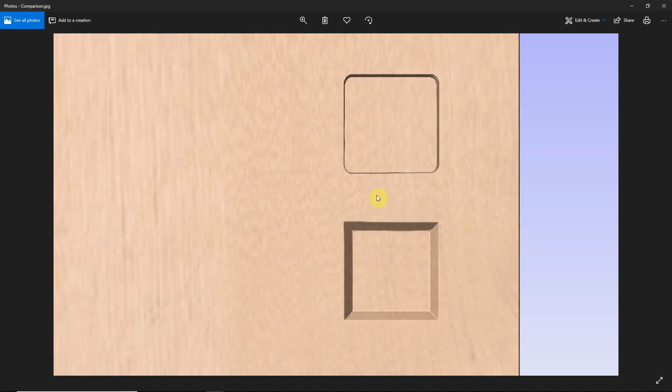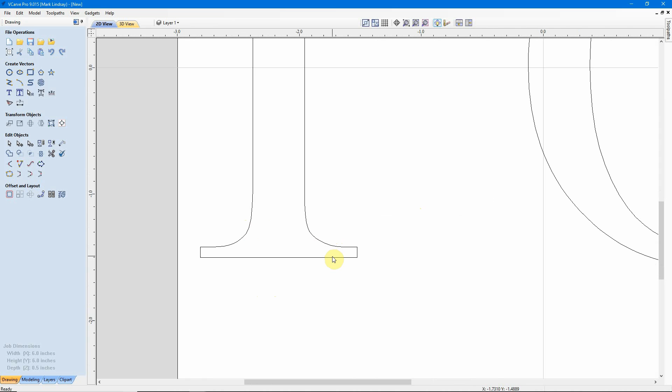Now, another thing to pay attention to: I said the distance between this vector here and this vector here, that also means the distance between them over here, and the distance between this vector here and this vector here. V-carving is considered by some to be 2.5 dimensional carving, and by others to be 3-dimensional carving, meaning that all 3 axes work at the same time to carve out this area here. Let me go ahead and calculate the toolpath and I'll show you exactly what I mean.

So I'll select the text here. We'll go over to the toolpath tab, and I'm going to go down here to the VCarve/engraving toolpath. Select that, and our start depth will be 0. We are going to start at the top surface of the material. When V-carving, always set your Z0 to the top of the material. So I'm going to use a start depth of 0. I'm not going to use a flat depth. We'll get into that in another video.

The V-bit I'm going to use for this demonstration is a 90-degree V-bit with a 1/2 inch cutting diameter. I'm not going to make any changes here at all. I'm simply going to call this V-carve 90 degree, and we'll calculate. Now we have our toolpaths created, and if you notice, it looks a little bit different than what we would imagine. If we get over here into the O, we see it's going to have to make a couple of passes at different depths.

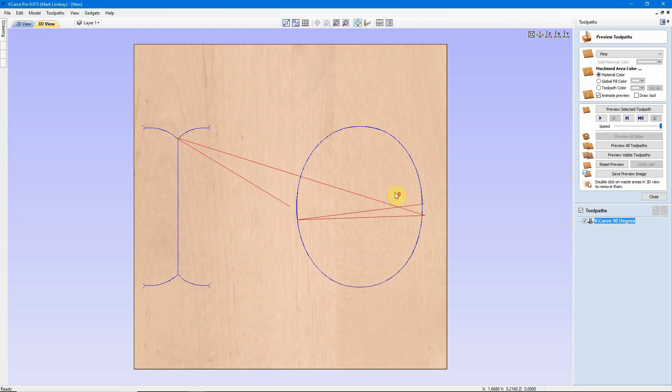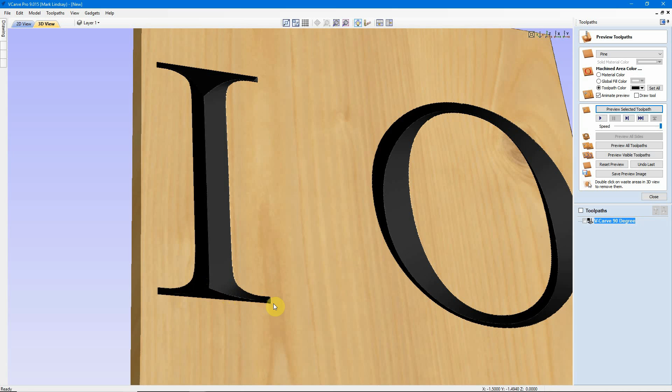I'm going to leave the material alone. I will select the toolpath color, black. Well, that jumped to pine. Okay, fine. And we'll preview this toolpath. And as you can see, when we zoom in a little bit, our tool carved a straight line down here at a depth. Then when it got to this corner, it made a curved pass, and the Z kicked in and retracted that bit to make this nice narrow portion in here. Then it came back, lifted up here to make that square corner, lifted up here to make that square corner.

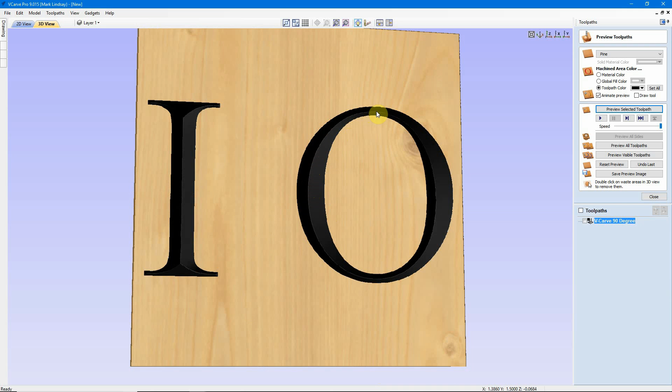By the same token, look at this O, because we have a wider area here between the outside and the inside of that O. We cut pretty deep here. Then as this vector narrowed down, the Z kicked in and lifted that bit up, and we cut much shallower here. Now if you recall from the other tutorials, if we look down here at my X, Y, and Z display, you can see my Z is at 0 because it's on the material surface.

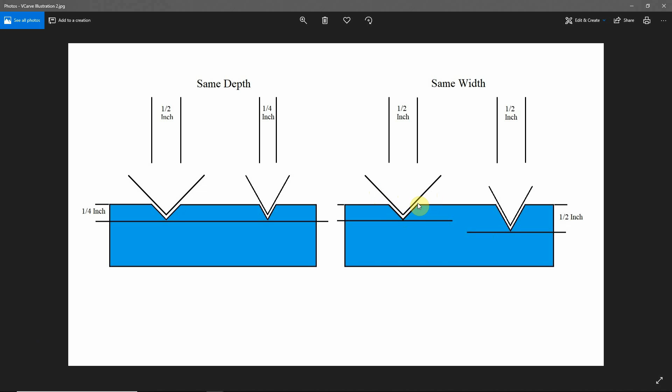But when I drop that pointer down into this trench, for lack of a better term, we can see that it cut almost 1/4 inch into the material. We're at negative 0.2467. Almost 1/4 inch into the material. That was so the edges of this bit could get in and ride the edges of those vectors. If we go over here to the letter I, we can see about the same, a little bit less, 0.2069. So that's how deep it had to plunge to get these real wide areas.

Now if you watch the letter O here, as those vectors get closer and closer together, the depth on my Z gets shallower and shallower till we get up here to the top, and we're just a little over 1/16 of an inch deep. My point in all of this is that it's a combination of the width of the space between the vectors and the angle of the V-bit that dictate how deep that bit is going to cut in order to do the V-carving that we want it to do.

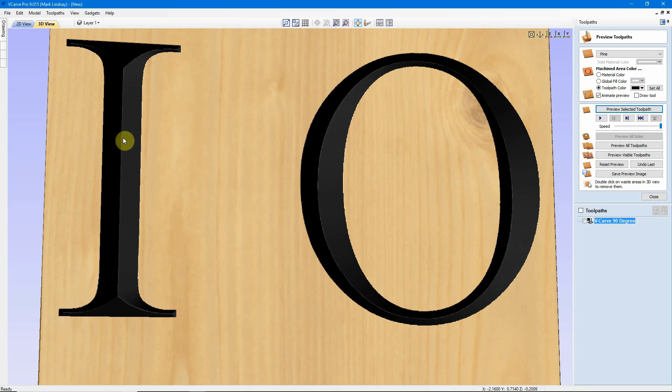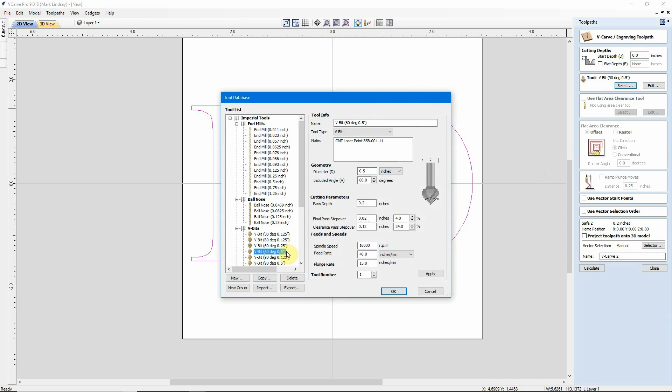Let me reset my preview. I'll close that and we'll go back into the 2D view. They are still selected. I'll do another V-carve and engraving toolpath, but this time I'll switch over to a 60-degree V-bit with a 1/2 inch cutting diameter. Make no changes here except to call this 60 degree.

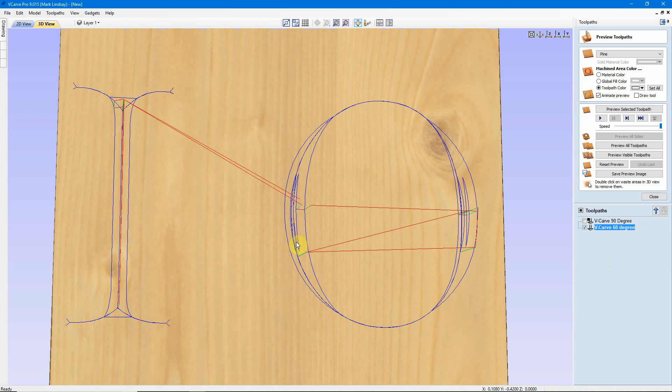Calculate. And already we can see a little bit of a difference. To carve the letter I, it's going to have to do it in a couple of passes. To carve the letter O, it's going to have to make 2 or 3 passes. So let's go ahead and preview this toolpath. We'll set my toolpath color to black. And we'll preview that toolpath. Again, we got a good result.

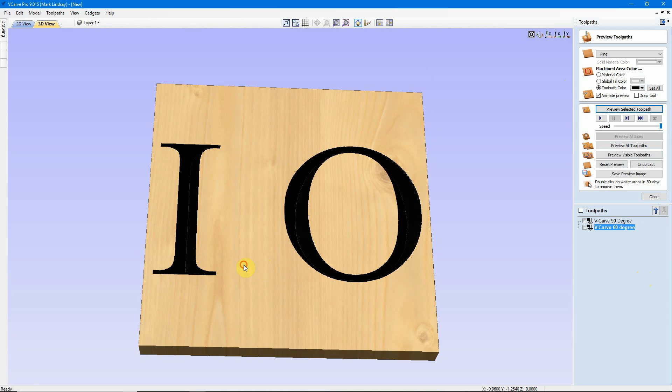If our material is 1/2 inch thick, we've machined a little over 2/3 of the way through that material to get this width out of a 60-degree V-bit. If we come over here to the letter I, we're a lot better off. We're at 356 thousandths. We're over 1/4 of an inch deep, but we're not quite 3/8 of an inch deep.

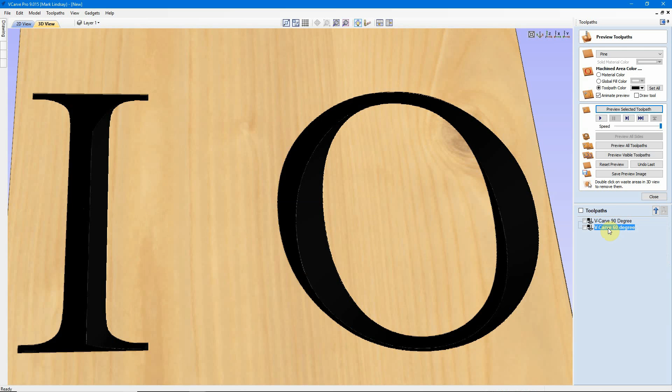For a situation like this, I think we would be better served running the 90-degree V-bit rather than the 60-degree, just simply because we can still get our width without carving as deeply into the material. And this is something that will come with experience, knowing when to use which bit. And this is the time to experiment. Now we know that this is going to cut about 2/3 of the way through the material. That's probably not our best way to go.

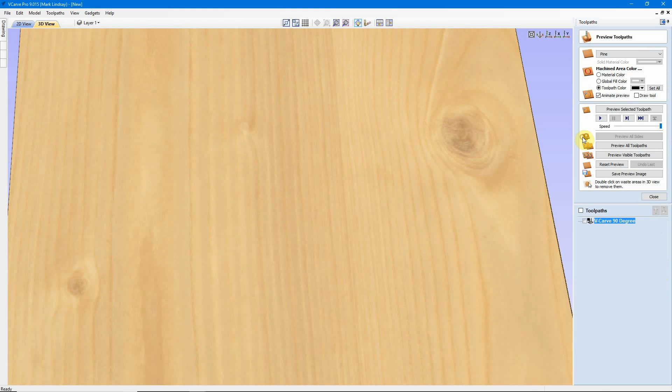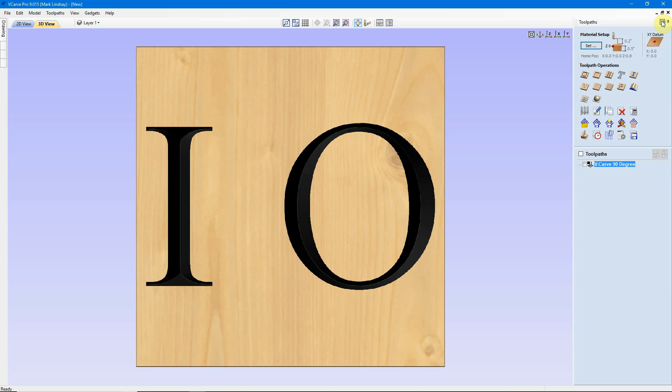I'll reset the preview and I'm going to delete that toolpath. If I were going to carve this, I would use the 90-degree V-bit, where I know I'm only going to carve about 1/4 of an inch deep, maybe a little more, maybe a little less. Text size, or the size of the object that you are carving out, will help dictate which bit you should use. Now, if I select this and go back into my text editor, we can see I just have the I and the O here. Well, my text height is 3 inches tall.

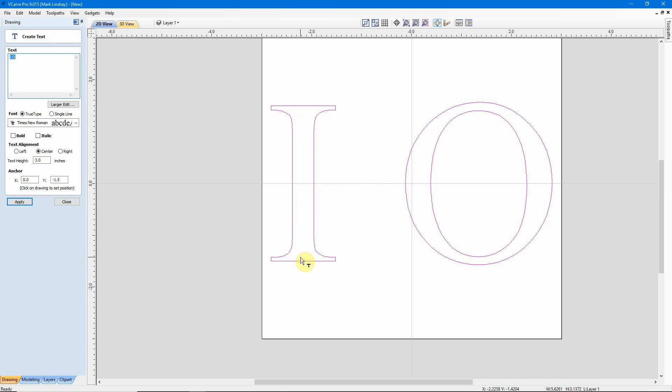If I were going to carve anything 4.5 inches or larger, I might want to switch over to a 120-degree bit, so it carves even shallower than this. If I were going to make this 1/4 of an inch tall, or text height, I might want to switch to a 30-degree bit so that it carves deeper, so that we don't lose any detail if we sand.

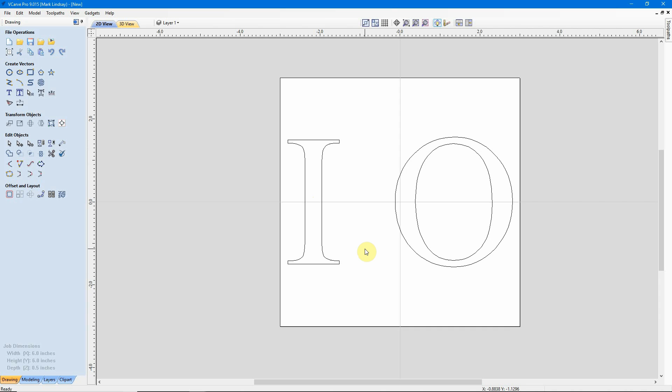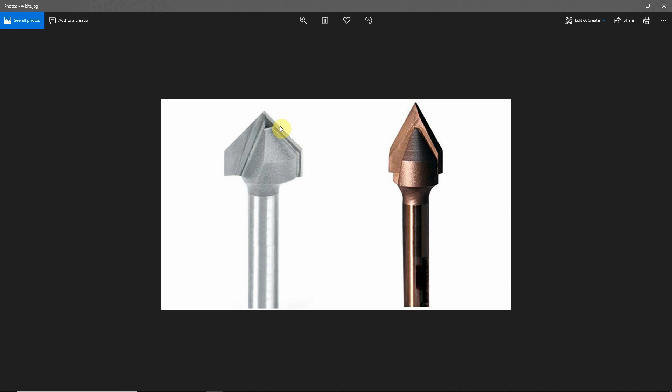That's a lot of information to take in on the first outing. The takeaways I hope you get from this are, it's the bit angle and the width of the area that you're attempting to cut that determine the depth of that cut. The lower the number on the angle of your bits, the steeper the angle is; the higher the number, the shallower it is. So I think we'll call this the end to the introductory video to this series.

In the next video, we'll get into V-carving a simple text sign. Then in future videos, we will get into carving to a flat depth and maybe doing some pictures.